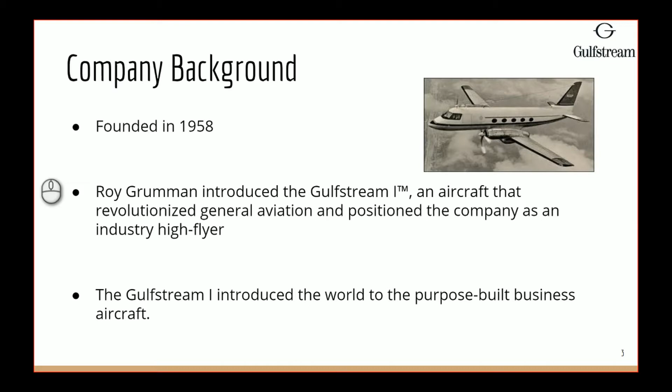Project objective for this senior project is in fact to decrease the paint cycle time by 3 days at Gulfstream's Long Beach hangar. Long Beach is tasked with all exterior of the planes. Planes are sent from their headquarters in Savannah, Georgia to Long Beach, and paint and prep happen in Long Beach, California.

So for a plan of attack, the first thing we really went through is gathering data and analyzing the current system that they do have, identifying room for improvement, providing alternative solutions to Gulfstream, evaluating those alternatives that were chosen, and lastly, final suggestions for Gulfstream.

Our first step, like with any project, was to do data collection and analysis of that data. This phase included a lot of things, but some things we'd like to talk about are some time studies, value stream mapping, utilizing lean, regression analysis in order to forecast completion time for every aircraft in the year 2020, facility layouts, worker hour studies, and lastly, rework studies.

So there are two processes within this prep and paint process. It's prep and paint. So for the prep process, it takes approximately 6 days on average. This is a process map of it. It's kind of broken down and minimized a little bit just so it's easier to understand. Some things that are important are a lot of masking, priming, and sanding, inspection and demasking, and that really ends the prep process.

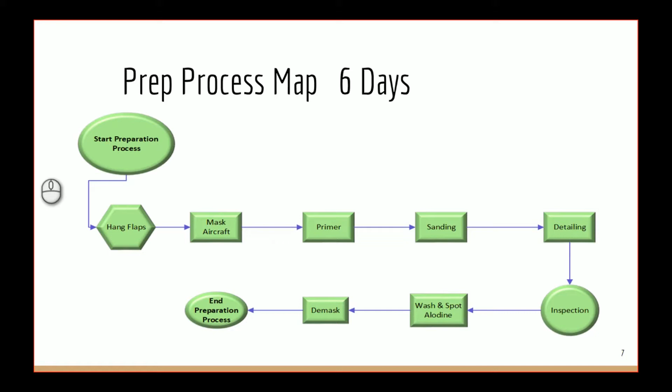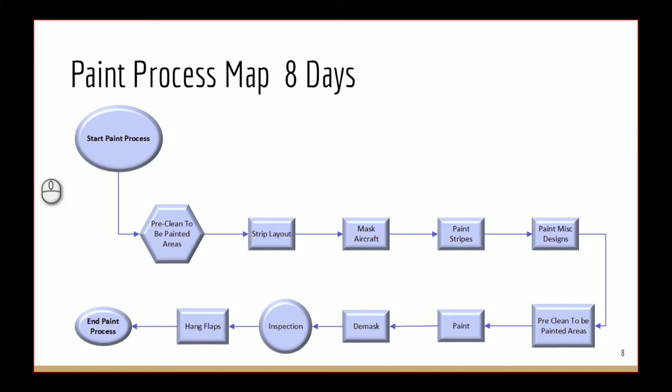Next up is the paint process, which on average takes 8 days. This is also a cleaned up version of the process map. And as you can see, this involves a lot of masking, laying out, painting, more demasking, inspection, and really ending the paint process. So again, prep takes 6 days, paint takes 8 days, taking 14 days total.

This is the current facility layout for the prep hangar. There are 3 hangars: prep, paint, and layout. We decided to focus on the prep hangar, as we'll get into when we go through other data analysis later on. Anyways, everyone is coming towards the plane. This plane is parked, and workers, as well as resources and carts, shelves, anything like that, everyone is going towards the plane. It's not an assembly line per se. It's really bring everything to a centralized location and work from there.

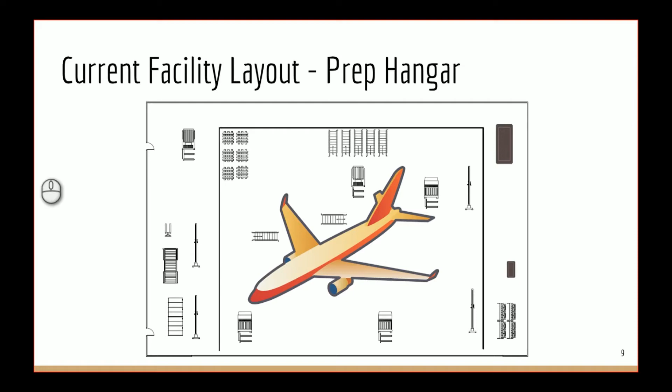Value stream map. The purpose of the value stream map is to identify and remove or reduce waste in value streams, thereby increasing the efficiency of a given value stream. The main 4 processes are preparation, layout, paint, and inspection rework. There are 2 shifts with 12 operators. Takt time is 7.5 days. Process lead time is 18.45 days. The value added time is 267 hours with a ratio of 90%, which means that 90% of the time the work is being completed.

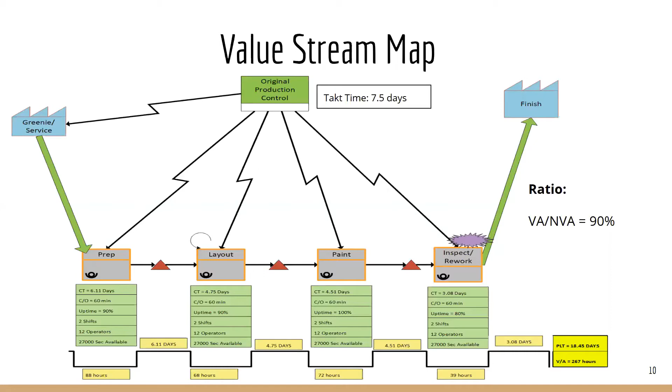Forecasting linear regression. The dependent value is the actual days that it takes to complete the entire process. The independent value is the number of aircraft. Analyzing the data from 2017 through 2019, we were able to forecast the movement of the future completion time that it might take for 25 airplanes in 2020.

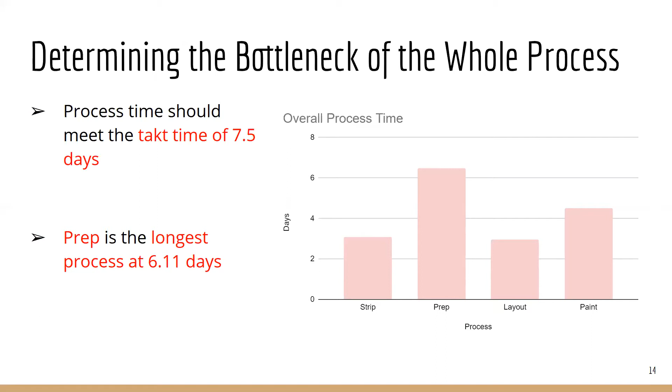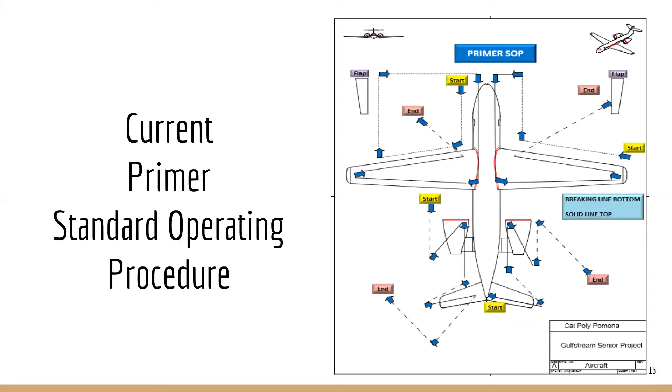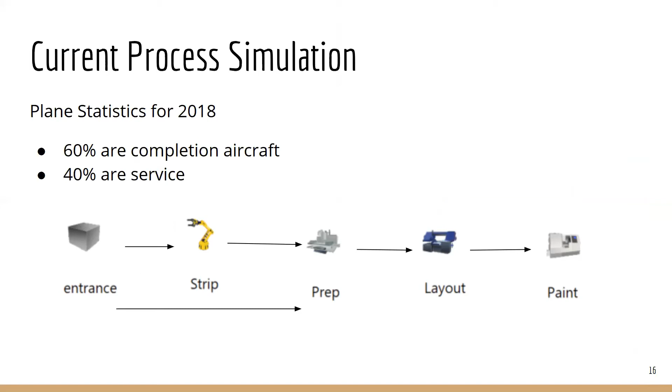This is the current primer standard operating procedure. The flow chart shows how the operators move in the process. The current process simulation: per the plane statistics for 2018, 60% are completion aircraft and 40% are service aircraft. It shows a visual representation of the flow of the simulations. The overall process time, based on the simulation, is 15.7 days and requires 14% overtime on every aircraft.

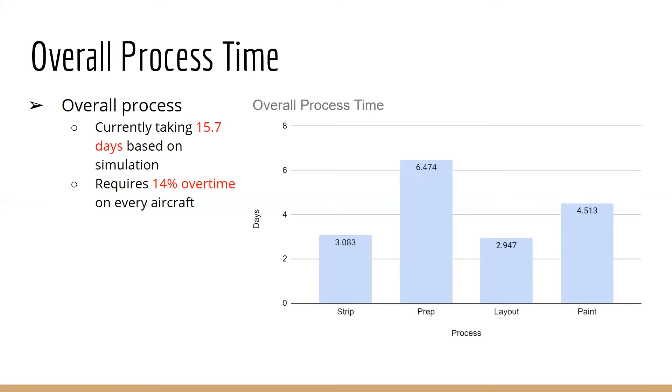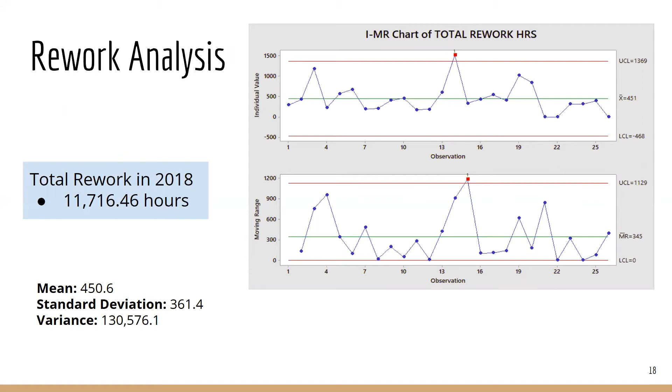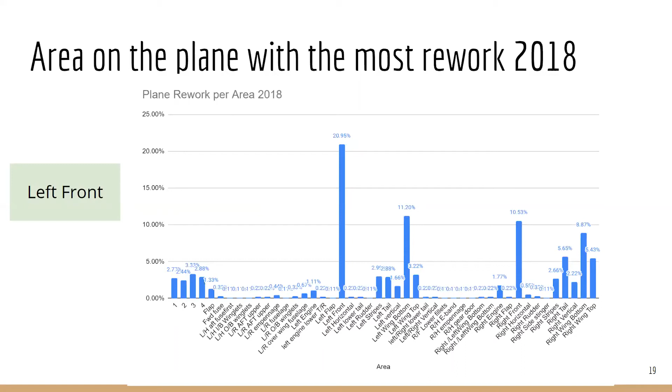From the quality control chart, we were able to move on and try to account for the amount of rework in certain parts of the airplane, and we noticed that the most defects were from the left front, and that accounted for 20% of the rework. From then we were trying to figure out why it led to the left front being the most. What was the problem with the left front that had to be reworked?

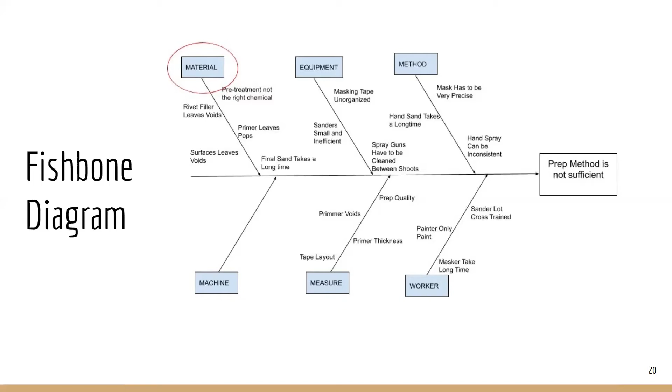We created a fishbone diagram to map out the process, and we determined that the material was not sufficient. It was a little too thick and it didn't quite fill the smaller areas within the rivets of the aircraft. So we came to the conclusion that the chromium-based primer leaves voids in the rivets, and it's only noticed once the aircraft is finished with the final step, once it dries, where the certain areas that the paint did not fill.

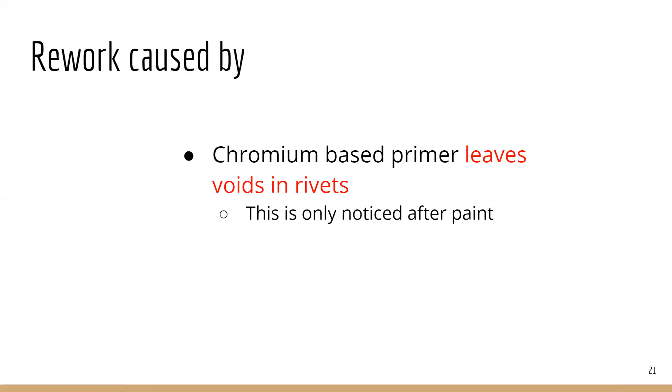So we then presented alternatives to try to fix the problem: alternative 1, which is reduce rework by changing the primer. Alternative 2 would be to hire more people to work in the prep area. This initial alternative 2 was then actually split into several alternatives that will be later discussed.

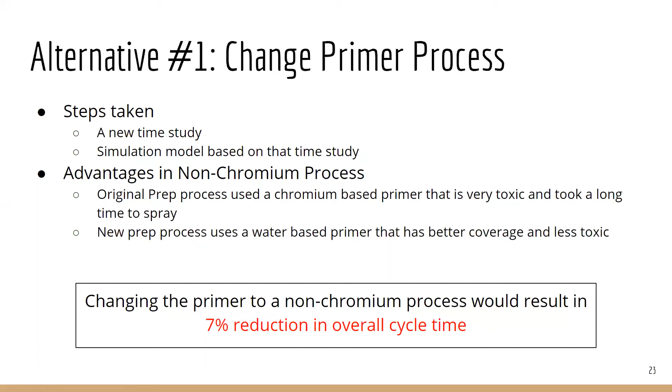The results for alternative 1 brought the new output down to 14.7 days, which is a 7% reduction in overall cycle time, which is okay, but it still requires over 10% more overtime work at prep, which is not the optimal solution. The throughput did increase by 3 aircraft per year.

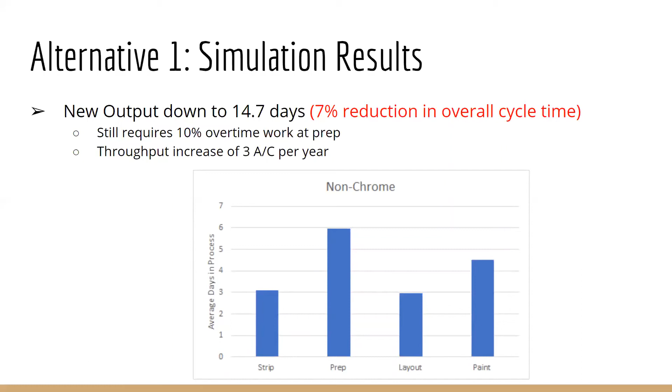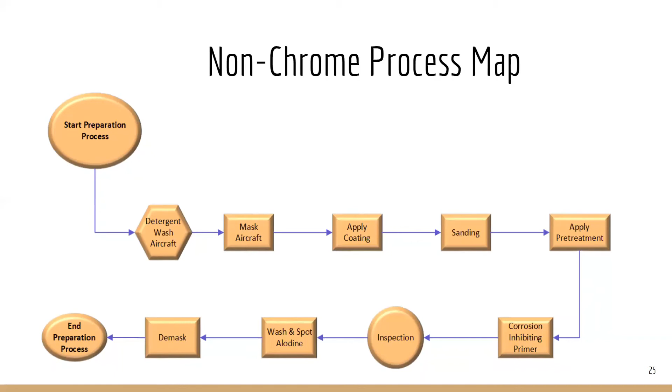Before we actually sent it to paint, it had to be inspected to make sure that there's a minimal amount of rework that had to be done in the overall process. Then we move on to washing and spotting with Alodine, demasking, and ending the preparation process.

From the implementation of the non-chrome prep process, the results showed that the cycle time actually decreased to 5.9 days from the original 6.4 days, which is a total 7% reduction. We wanted to further reduce the cycle time, and we discussed with workers and management two to three more alternatives that came about.

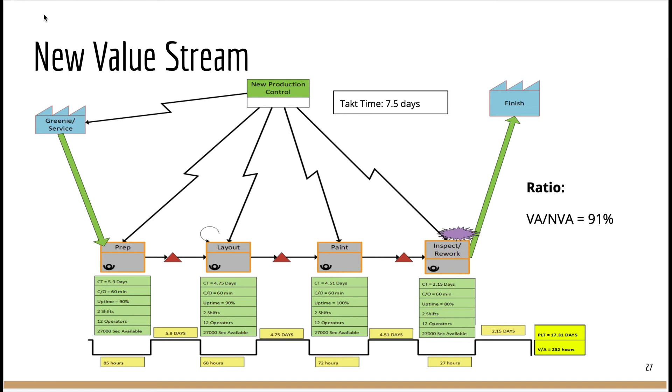Now with the new data that we have collected, we decided to put that into a new value stream map with the cycle time of 5.9 days on prep. This helped to bring our value-added ratio up to 91%. We then decided that we would like to try to improve the cycle time even more. So we presented a few alternatives to Gulfstream, and these were the ones that we both collaborated on and decided were the best to pursue.

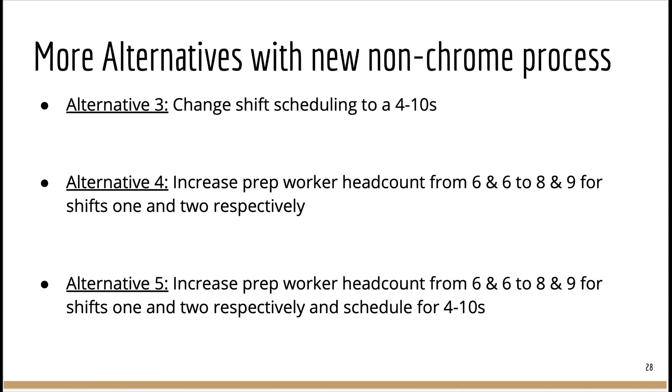So alternative 3 is to change the worker shift scheduling to 4/10s from a standard 5/8s, 4/10s being that they will now work four 10-hour shifts per week. Alternative 4 is to increase the prep worker headcount at the prep station from 6 on first shift and 6 on second shift to 8 on first shift and 9 on second shift. And then alternative 5 was to combine both of these alternatives to hopefully bring the strong suits of both together.

So for alternative 3, we created a simulation, and we actually found that with this scheduling system, it increased our cycle time by 1%, and that's just due to where the breaks fell in the processes and stuff. So this actually brought the new cycle time up to 14.74 days and still requires 10% overtime work on prep.

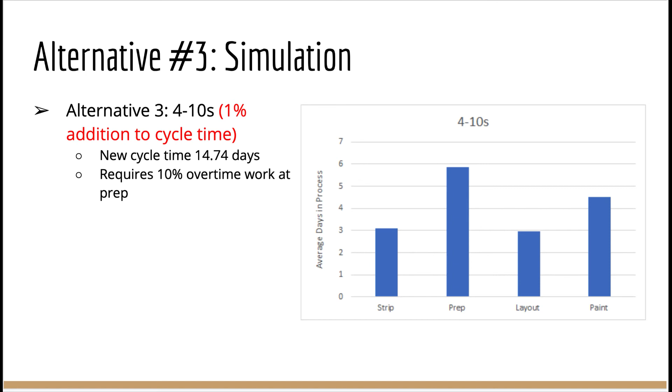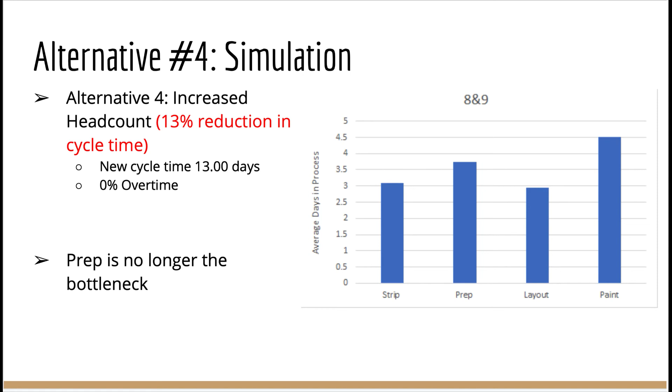For alternative 4, we simulated it, and we found that we actually got a 13% reduction in the overall cycle time for an aircraft, which brought the overall time to produce one aircraft to 13 days with 0% overtime at the prep station. And this allowed prep to no longer be the bottleneck and actually shifts it over to the paint station.

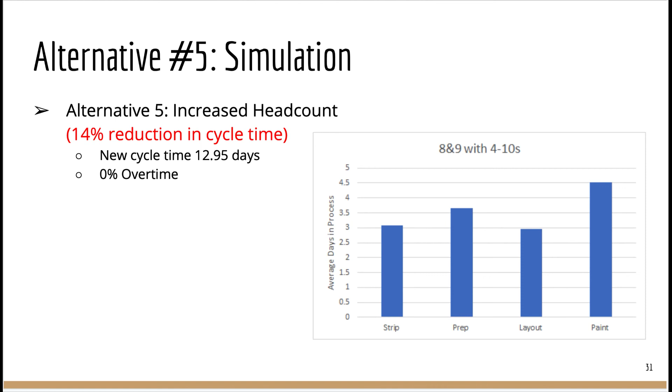We are deciding between the both that the 8 and 9 scheduling system is probably the best, as it requires us to hire new workers without having to change all of the current prep workers' schedules and lives and disrupt them in some kind of manner.

We then did a return on investment analysis for alternatives 1 and 4 together, meaning the non-chrome process, which is already implemented, combined with 5 more workers. And this actually increases aircraft throughput by 5 total annually, and can possibly net them an additional $100 million a year because of how much they are making on each aircraft.

So here's our conclusion. We decided that the best course of action for them is to both implement alternative 1, which they have done, as well as implement alternative 4, which is to hire 5 new workers. This will help us to reach our goal of reducing the overall cycle time by a total of 3 days, which was our original goal. This also equates to a 21% reduction in overall cycle time per aircraft.